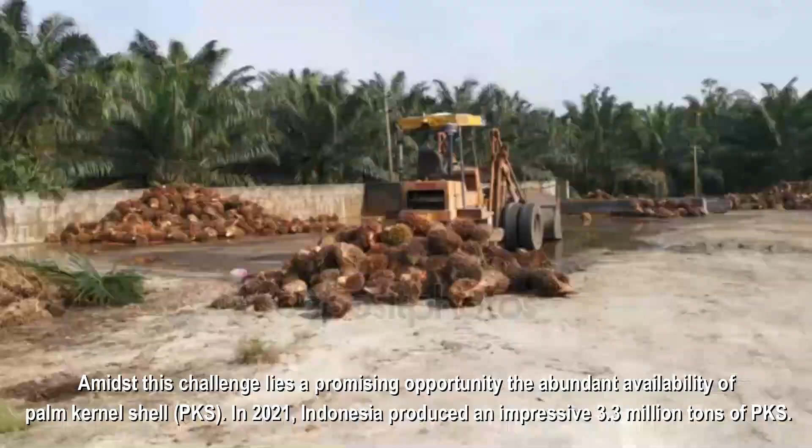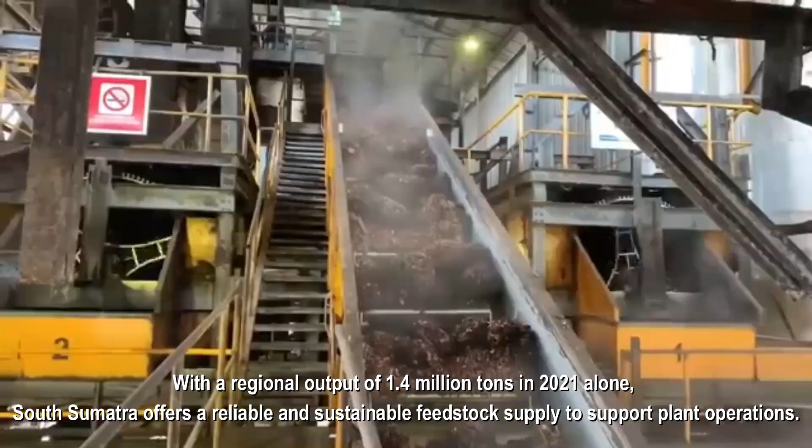In 2021, Indonesia produced an impressive 3.3 million tons of PKS. Notably, the southern region of Sumatra, rich in this biomass resource, presents itself as an ideal location for establishing a green methanol plant. With a regional output of 1.4 million tons in 2021 alone, South Sumatra offers a reliable and sustainable feedstock supply to support plant operations.

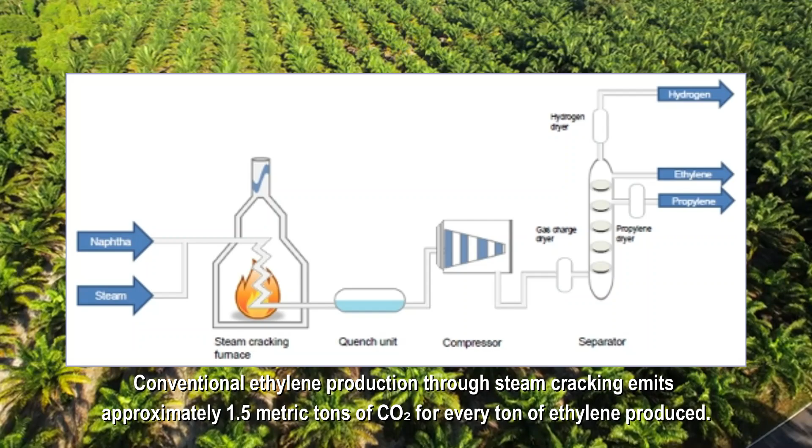As the world seeks cleaner alternatives, the development of a sustainable ethylene production pathway becomes increasingly urgent. Conventional ethylene production through steam cracking emits approximately 1.5 metric tons of CO2 for every ton of ethylene produced. Globally, this equates to over 260 million metric tons of CO2 emissions annually, representing nearly 0.8% of the world's total carbon emissions, which were estimated at 34 billion tons in 2020, according to the Global Carbon Project.

Fostering a greener future necessitates the presence of supportive regulations. The Indonesian government, through Presidential Regulation Number 61 of 2011, actively promotes the reduction of greenhouse gas emissions. These initiatives are aligned with the global commitment of the Paris Agreement, particularly emphasizing SDGs such as 9, 12, and 13.

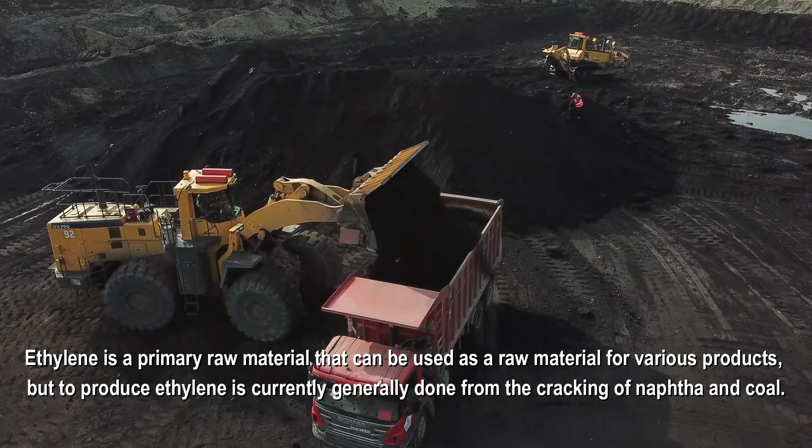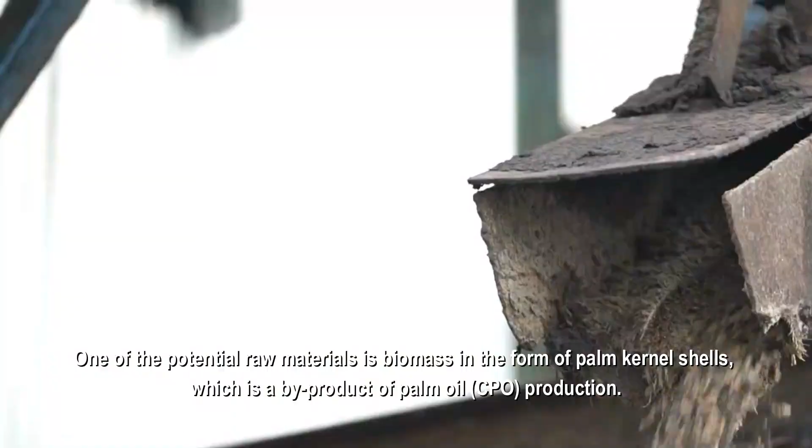Ethylene is a primary raw material that can be used for various products, but to produce ethylene is currently generally done from the cracking of naphtha and coal. One of the potential raw materials is biomass in the form of palm kernel shells, which is a byproduct of palm oil CPO production. Currently, the utilization of oil palm in Indonesia still focuses on the production of crude palm oil, CPO, which has a high demand in the global market.

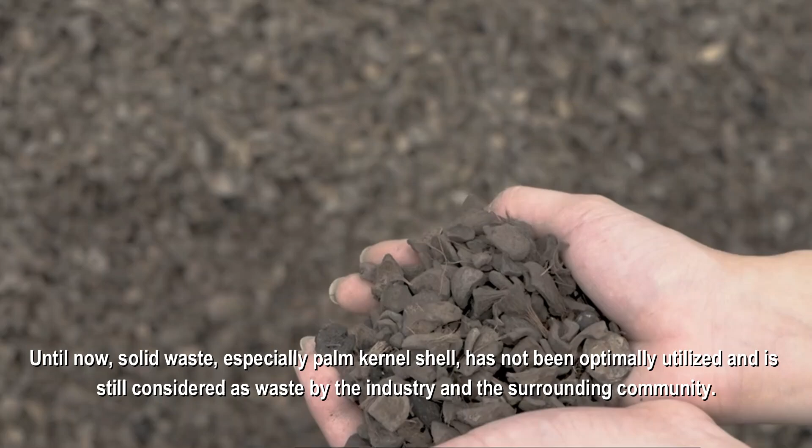In the process of processing fresh fruit bunches, FFB, into CPO, various types of waste are generated, such as solid waste in the form of empty bunches, shells, and fruit fibers. Until now, solid waste, especially palm kernel shell, has not been optimally utilized and is still considered as waste by the industry and the surrounding community. In fact, PKS waste has great potential to be reused.

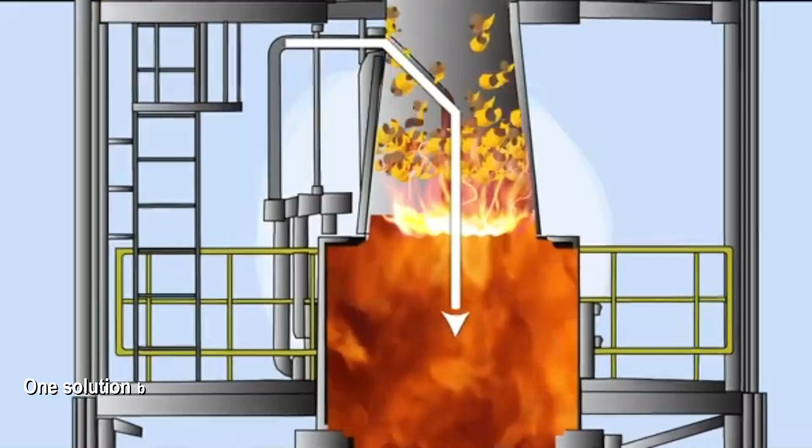According to BPS data, in 2021, Indonesia produced around 3.3 million tons of palm kernel shell. This poses a major challenge for national biomass waste management. One solution being developed is to convert palm kernel shell into synthesis gas through gasification technology, a step towards more sustainable renewable energy.

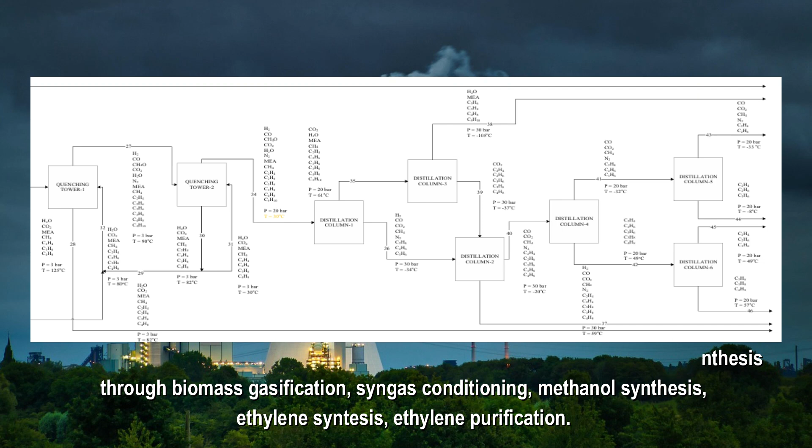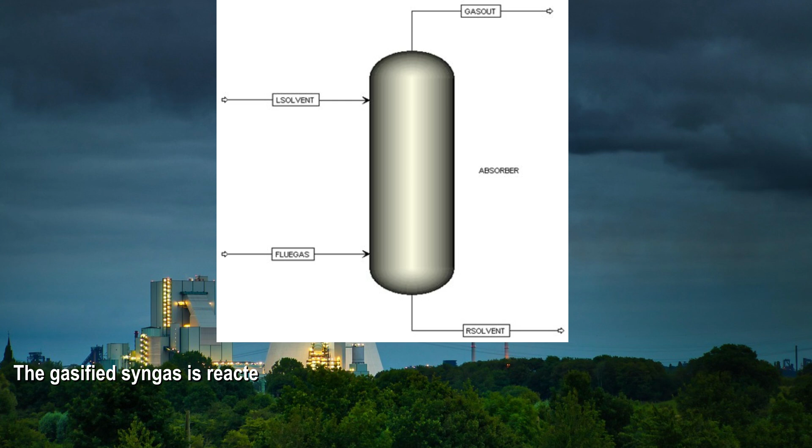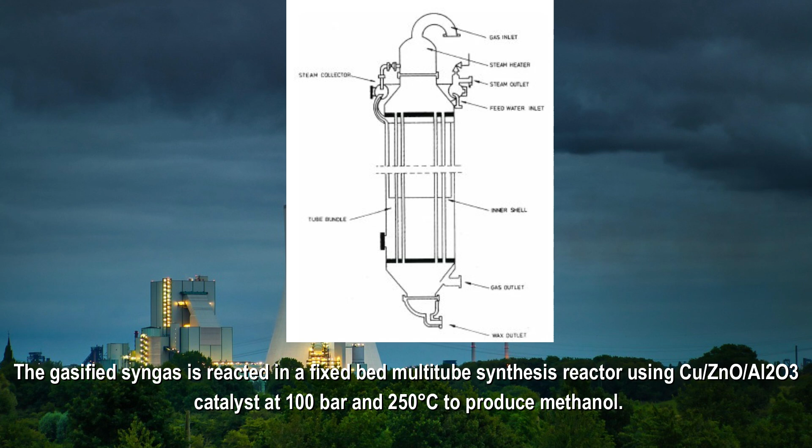The gasified syngas is reacted in a fixed-bed multi-tube synthesis reactor using copper-zinc oxide, aluminum oxide catalyst at 100 bar and 250 degrees Celsius to produce methanol. The methanol, with the pressure and temperature set, is fed to the ethylene synthesis reactor.

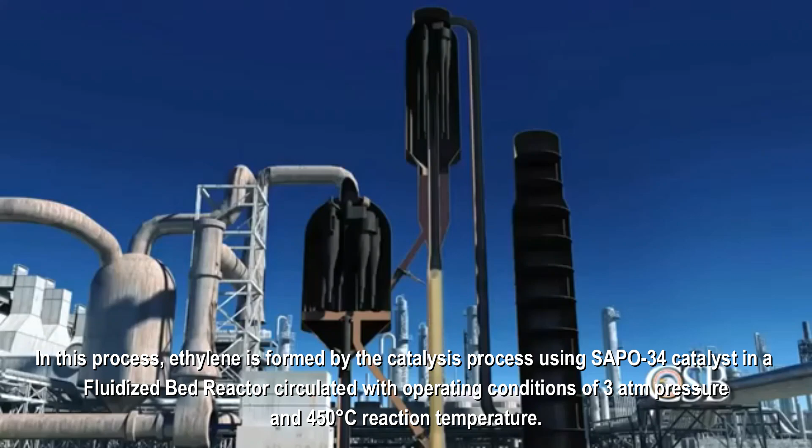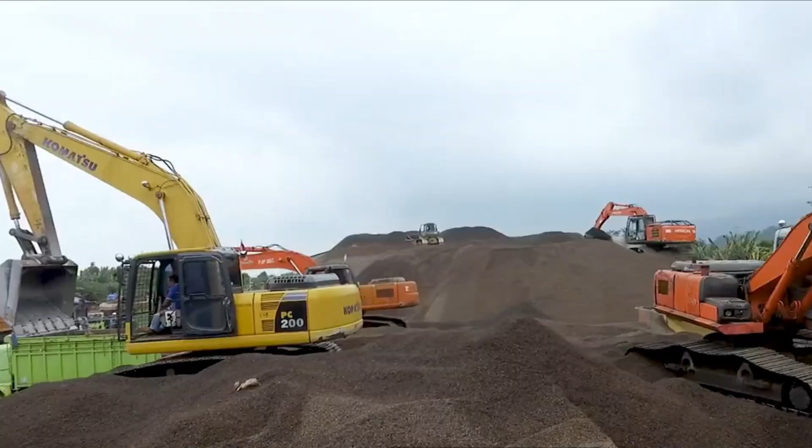In this process, ethylene is formed by the catalysis process using SAPO-34 catalyst in a fluidized bed reactor circulated with operating conditions of 3 atmospheres pressure and 450 degrees Celsius reaction temperature. This innovative process opens up transformative opportunities in the production of green ethylene to significantly reduce carbon emissions. This success is underpinned by a collaboration between supportive policies, advanced gasification technology, and optimized refining techniques. The journey from palm kernel shell to green ethylene is an important milestone in realizing a more sustainable and environmentally friendly future.